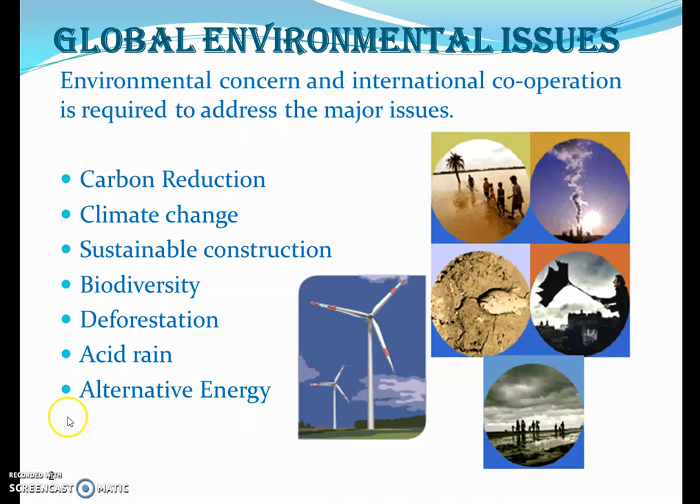Before going further, let's see what is climate change science or global warming. Climate change science is the study of significant and long-term changes to the earth's climate generated by both natural cycles and the impact of human activities. There is a different view - some say climate change science and global warming are the same, and some say different. Greenhouse gases include carbon dioxide, methane, nitrous oxide, hydrofluorocarbons, perfluorocarbons, sulfur, etc.

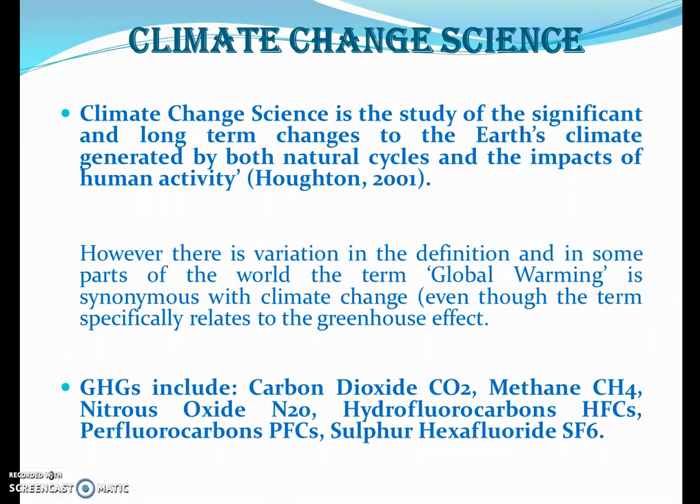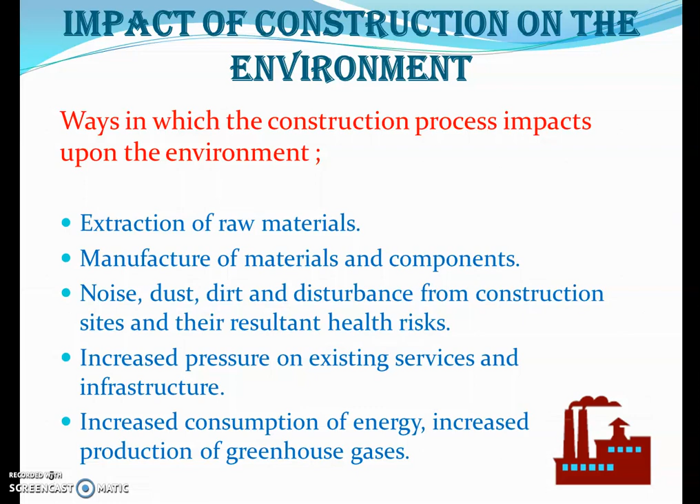Now let's look at the impact of construction on the environment. Ways in which the construction process impacts upon the environment include extraction of raw materials, manufacture of materials and components, noise, dust, dirt and disturbance from construction sites, increased pressure on existing services and infrastructure, increased consumption of energy, and increased production of greenhouse gas.

Construction is one of the largest industries in the world, contributing around 13 to 15% of global GDP. The built environment makes a significant contribution to environmental degradation. Buildings, including construction, operation and deconstruction, use approximately 15% of the world's freshwater resources, 40% of the world's energy, and produce approximately 23 to 40% of the world's greenhouse gas emissions.

It should be noted that around 17% of buildings' carbon emissions are emitted during the construction phase, and the remaining 83% at the operation phase.

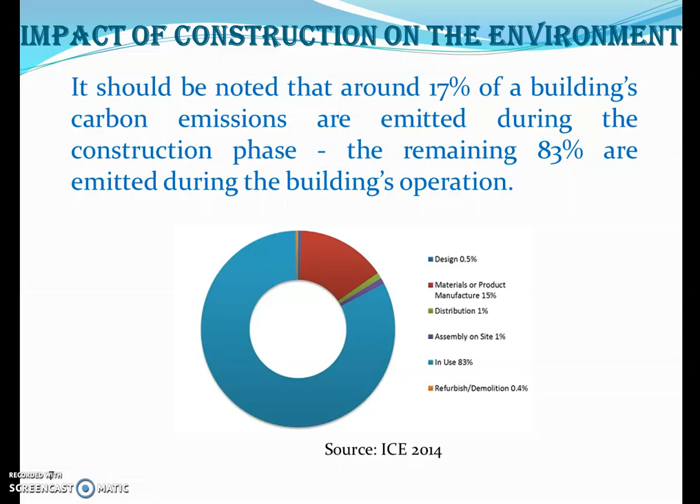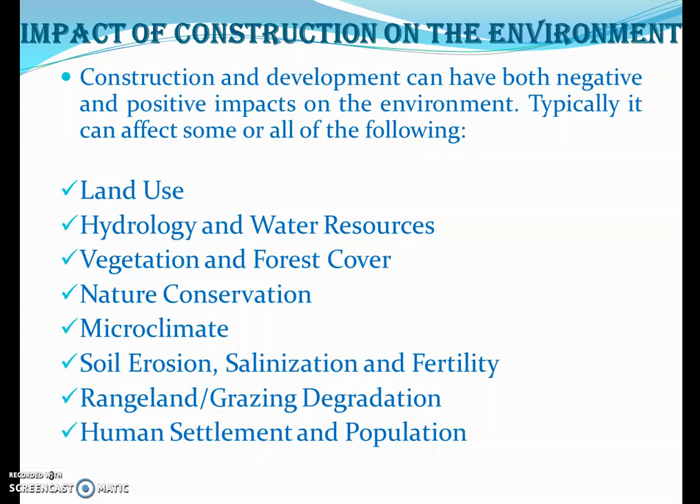So let's see what is the impact. Construction and development can have both negative and positive impacts on the environment. Typically it can affect some or all of the following, depending on the type of project - some have similar impacts, some have different ones - like land use, hydrology and water resources, vegetation, nature conservation, microclimate, soil erosion, human settlement, etc.

Let's take examples of different projects one by one, and I will explain the impact on the environment. First, the change indicators relating to construction with regard to land use.

For land use projects like a national highway or other development projects, there is loss of actual or potential cultivated land, loss of area providing functions of direct value to society, changes to land tenure and value, improved access and settlement, and change to landscape diversity and aesthetic quality of natural or man-made scenery.

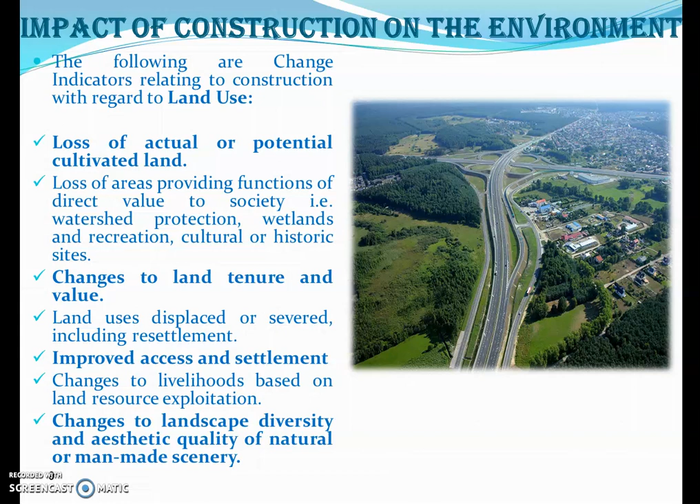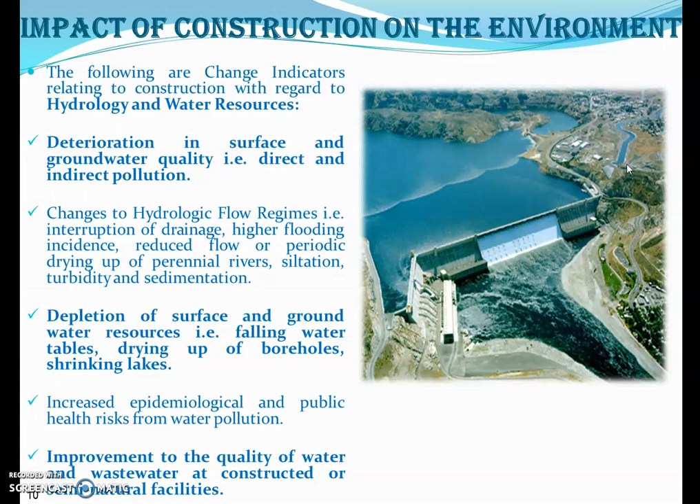Relating to hydrology and water resources: deterioration in surface and groundwater quality through direct and indirect pollution, changes to hydrologic flow regimes such as interruption of drainage, higher flooding, reduced flow or periodic drying, depletion of surface and groundwater resources such as falling water tables and drying up, and also improvement to quality of water and wastewater at constructed or semi-natural facilities.

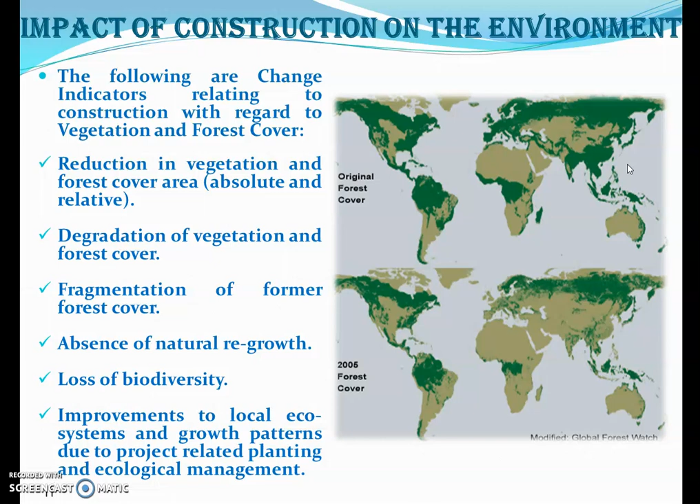Relating to construction with regard to vegetation and forest cover: reduction in vegetation and forest cover area, degradation of vegetation, fragmentation, absence of natural regrowth, and loss of biodiversity.

Regarding microclimate: change in air quality related to change in land use, localized change to weather, change to local ground and air temperature regimes, change to local wind patterns, and change in natural light level due to overshadowing, etc.

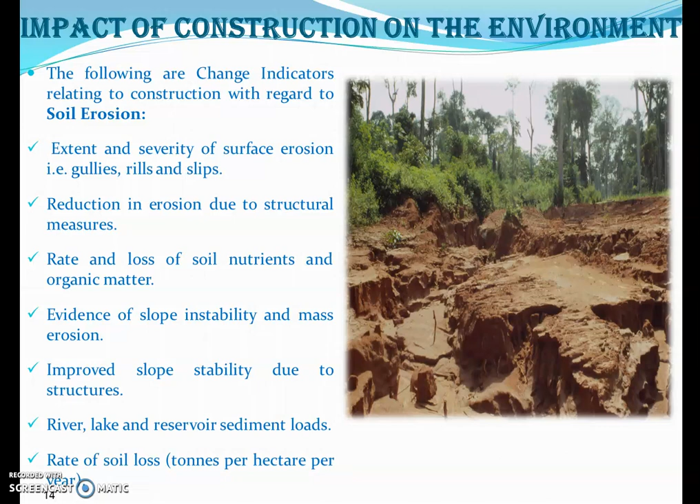With regard to soil erosion: extent and severity of surface erosion, reduction in erosion due to structural measures, rate and loss of soil nutrients, evidence of slope instability and mass erosion - and some projects will improve slope stability also. As I mentioned, these impacts can be both negative and positive.

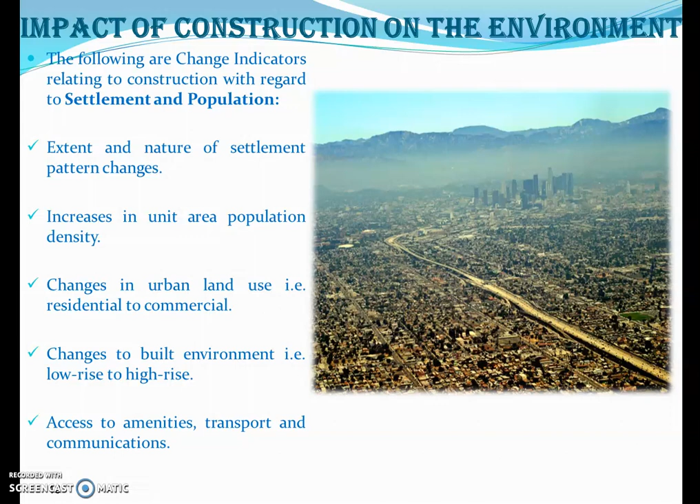Then rangeland degradation, then settlement and population, that is extent and nature of settlement pattern changes and increase in unit area population density. When development occurs, people migrate to new areas, causing a change in settlement of the population.

So what will be the role of the construction industry in development as well as sustainability? If climate change and its impact are to be tackled effectively, the construction industry must take a direct role at three levels: mitigation, adaptation, and secondary effect.

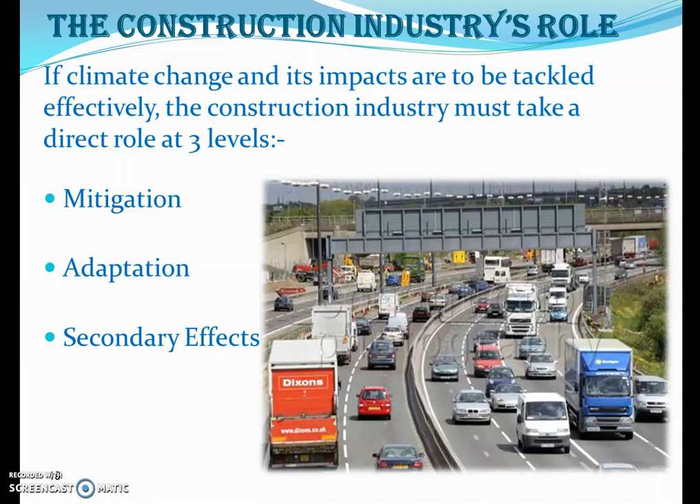What is mitigation? Reducing the impact of energy generation, transport, construction, and operation of buildings and infrastructure.

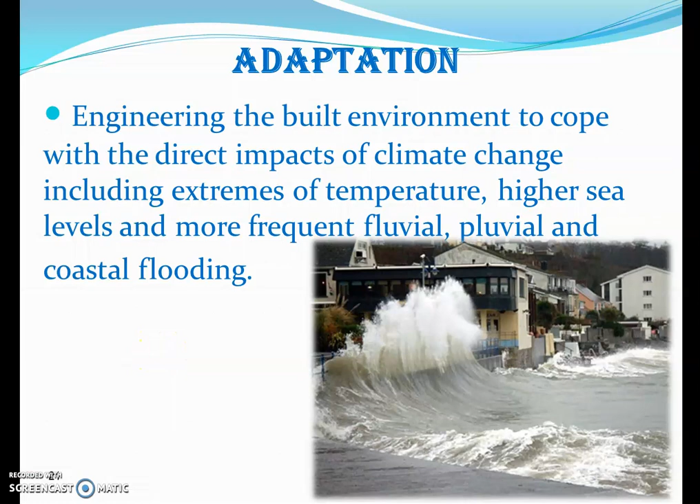Adaptation means engineering the built environment to cope with the direct impact of climate change, including extremes of temperature, higher sea levels, and more frequent fluvial, pluvial, and coastal flooding.

Secondary impacts are understanding and dealing with the downstream impact of climate change, for example the impact of mass migration and changing demand for water and sanitation on infrastructure networks.

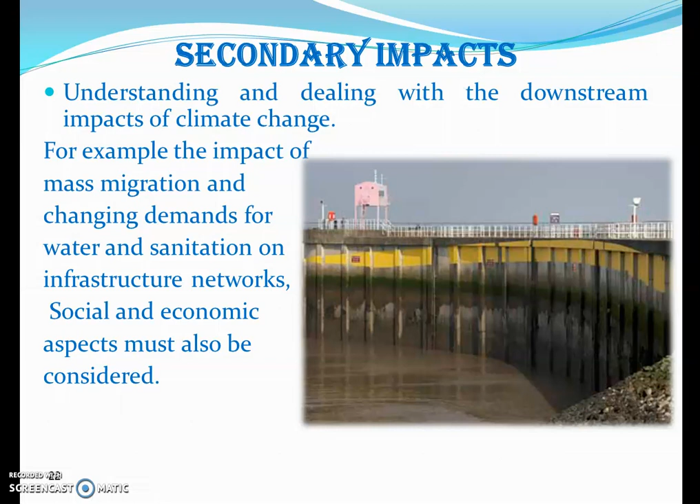Social and economic aspects must also be considered. So when a construction project develops a mega city and migration starts, we have to see the change in demand for water and sanitation.

The role of the engineer: professional institutions believe that the role of the engineer in combating the damaging impact of the construction industry on the environment must be promoted strongly.

So what is sustainable development? We talk a lot about development, but what is actually sustainable development? It is nothing but development that meets the needs of the present without compromising the ability of future generations to meet their own needs.

This is nothing but fulfilling our requirements at present without harming the requirements of future generations.

Sustainable development is founded upon the concept of the three pillars of sustainability. Truly sustainable development addresses each of these areas and seeks to reconcile their differing priorities and concerns: environmental, economical, and societal.

So how do we measure sustainability? How do we know when we are operating in a sustainable manner, or if a construction project is sustainable? These measures need to be holistic in their approach, considering all relevant environmental, social, and economical aspects of construction.